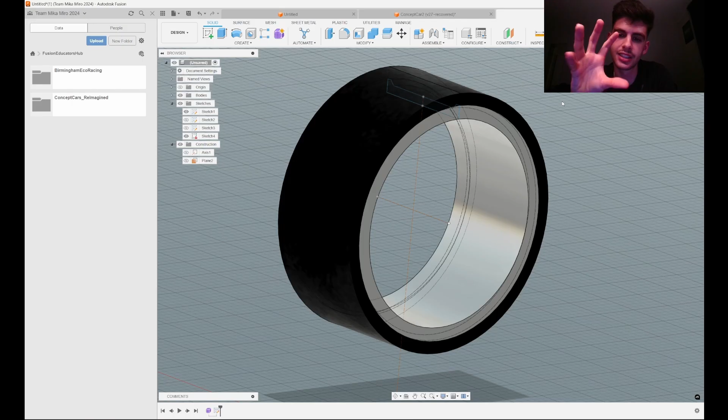Hopefully it is helpful in some way, but I got to the end point here where we are now, and at this point I've left the forms environment, so I clicked the tick on the forms environment, because now I want to draw something a bit different. I want to draw the inside piece of the rim. Usually you'd be able to draw on a face, but this face is a face from a form, so you can't actually do that.

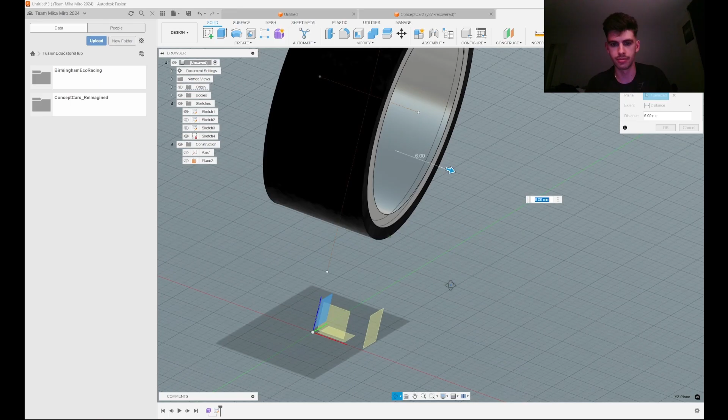So what we'll do is we'll create an offset plane from here, and we'll move it out, let's say 6. Usually that should be close to it. Oh, it actually is perfectly in line with it, which is good for us, but we'll use it as our sketch plane. And now we'll press project as before on our circle and the center of our circle too, and then we'll start drawing.

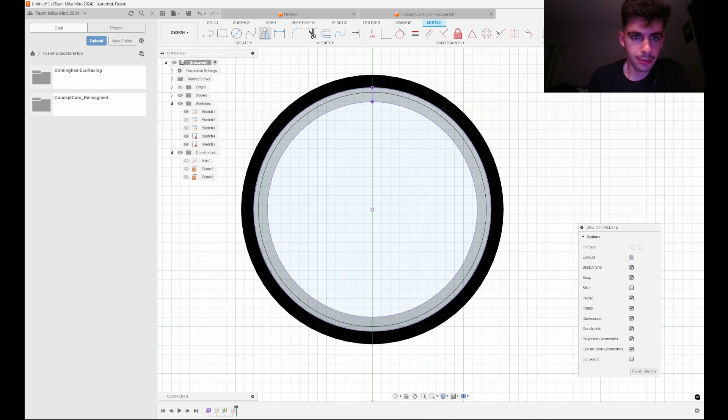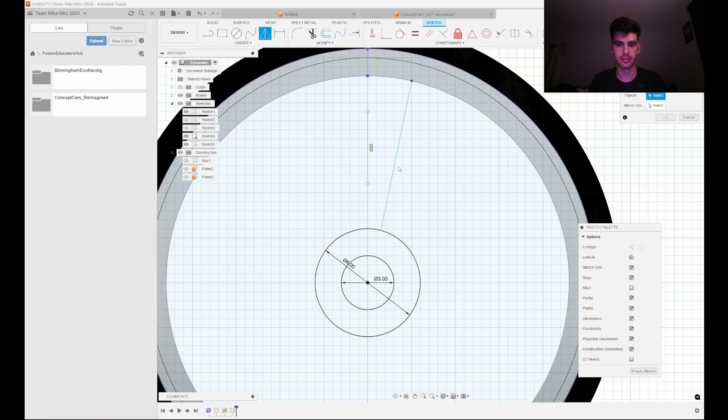I'll start doing a pretty simple version of what I might expect you to do. So I would draw a ring in the middle, and then let's draw some trapezoid shapes going around the middle. So how do I do that? I'll press on here with a line, go out to maybe here, and then I'll do a construction line in the middle so I can then mirror that across so that it's the same line on both sides. Turn off construction, mirror this across there, press OK.

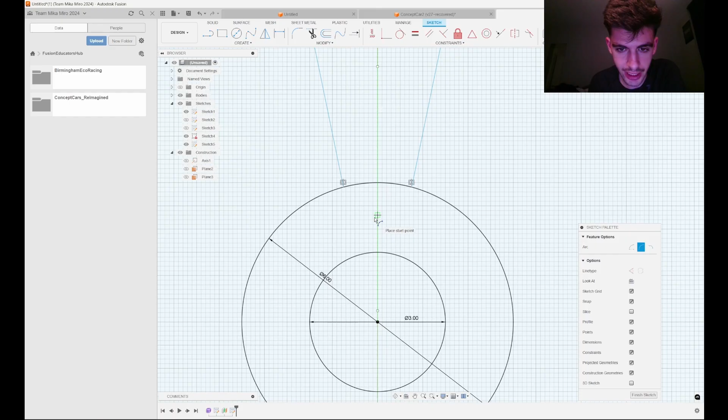Now we'll use a different sketch tool called the 3-point arc just to connect these pieces together. Press on there, press on there, press in the middle, press on there, press on there, press in the middle. Now we've got our trapezoid shape. I also want to cut some corners and make a kind of screw shape here, so let's go in the middle and make a circle instead. There, and that's a 2.5 circle. Press OK, and now we want to repeat this around the entire middle.

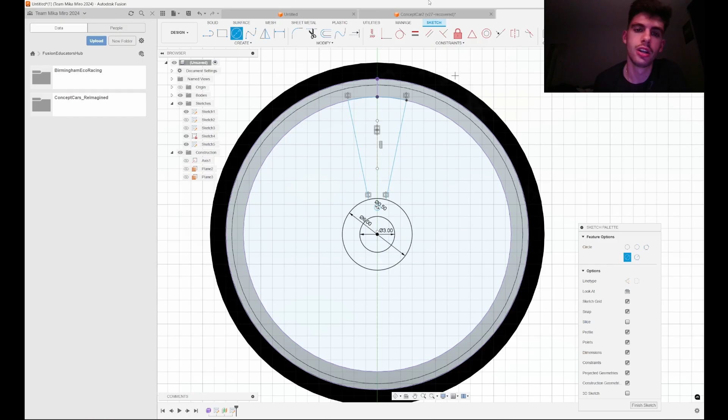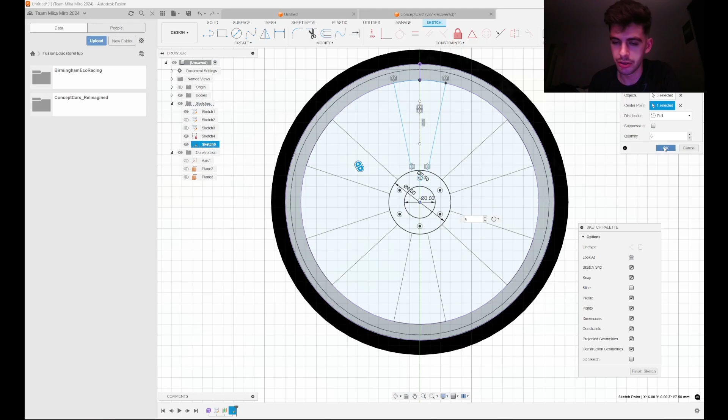We could painfully go around and do it all and check all the geometry, or we could use a very cool tool called the circular pattern tool. All this does is you select your profiles, and then select the center point you want to revolve around, which is here, and it will just do that for you. You can now change the quantity you want. 8 work? Let's do 6. Press OK, and there we go. There's our shape for the inside of our rim.

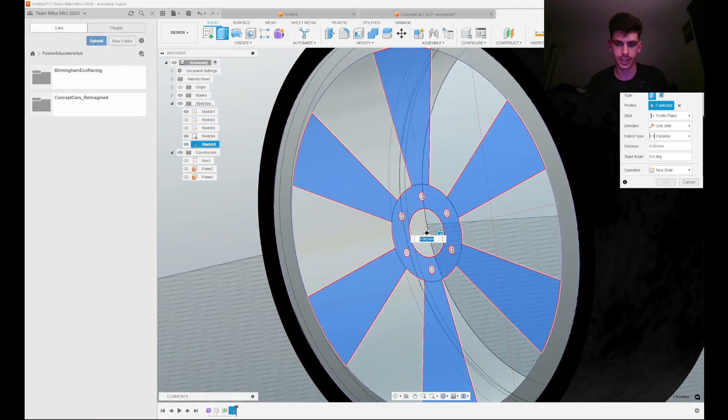So let's press finish sketch, and now we can use the extrusion tool. You can press E, or you can press on this button here. So I'll press E here. Select all of your geometry you want to extrude, and then extrude it like so. Let's make a new body, otherwise it will join it to the rim, and there is our shape.

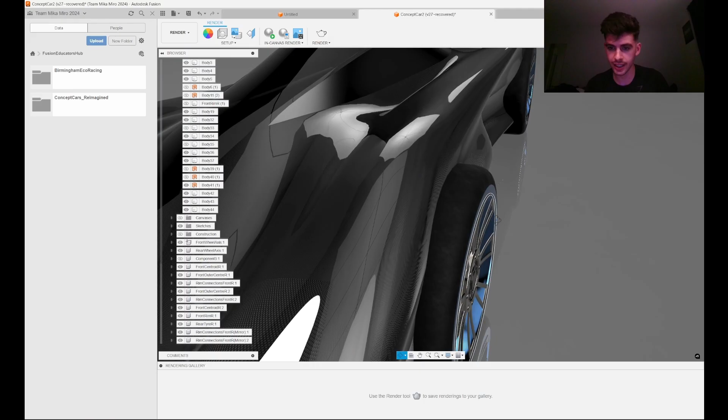Now obviously this is a very basic version of it. On my car I made it a bit more complicated. Mine actually goes concave inside the wheel. This is a bit more complicated, so I'll just tell you what to do, and if you are confident enough you can go ahead and do it. I did a 3D sketch. I can actually just show you how that works in terms of the interface.

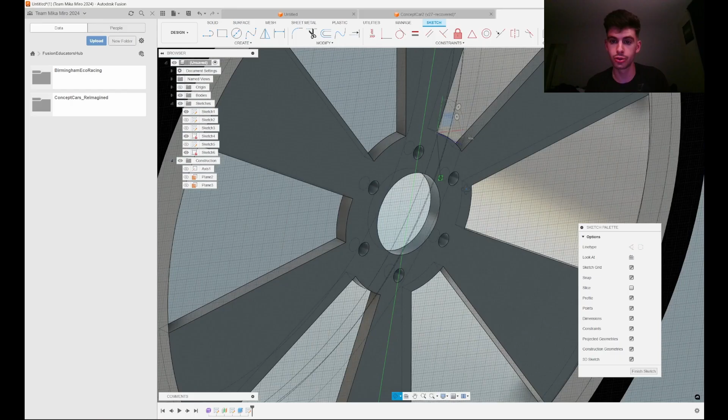Onto the sketch in here, 3D sketch, I would click the tick down here, and then whenever I make, let's say, a spline, I get given the option for what plane to draw on. So what I would do in that case is click on this plane, go on the side, and then start sketching the profile, and then extruding it from there. And rather than using extrude, use the press pull tool. Press pull tool is here. As opposed to the extrusion, you can actually press pull a curved surface and it just pulls it out like that, a little bit like how it works in the forms environment.

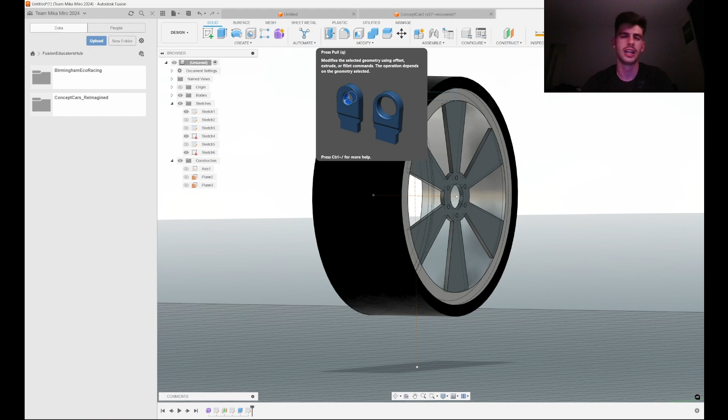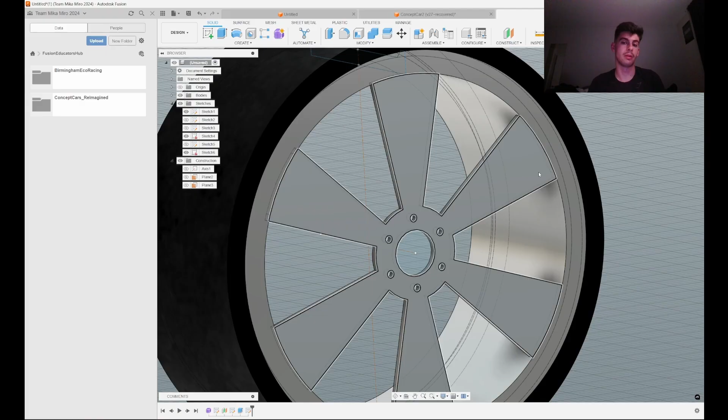So I won't do an example of that. I might do it later on in a separate series. But for now, that's how you do a basic outline for the inside of your wheel rim. Obviously add some patterns in here, make it more efficient in terms of material. You maybe want to cut this out. Does it need to have all this material? Probably not. But now, hopefully you understand how to use the offset plane tool to draw onto the outside of your form wheel rim. Now you've created your very own wheel and tyre for your concept car. Hopefully that was easy enough to follow, and let's move on to the next thing.